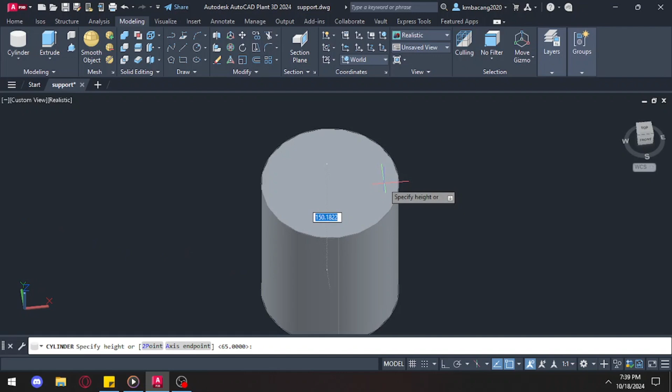First, let's make a cylinder that is 65 millimeters in radius and 20 millimeters high. With the same center, we'll make another cylinder that has a radius of 62 and is 65 high.

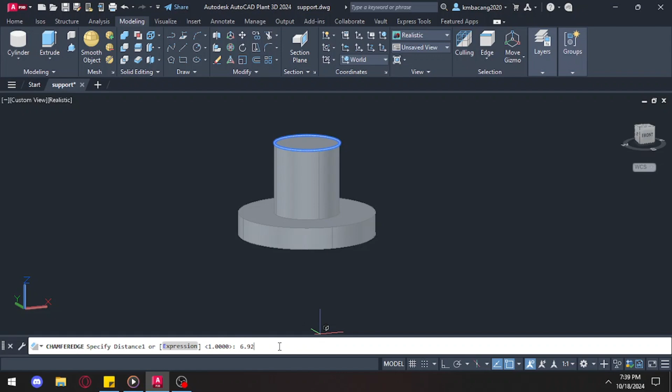And then we'll use the command chamfer edge to cut the edge of the top cylinder by 30 degrees. There's no option to put the chamfer at a certain angle, but through calculations we can know that one length of the thing is 12 and the other is 6.9.

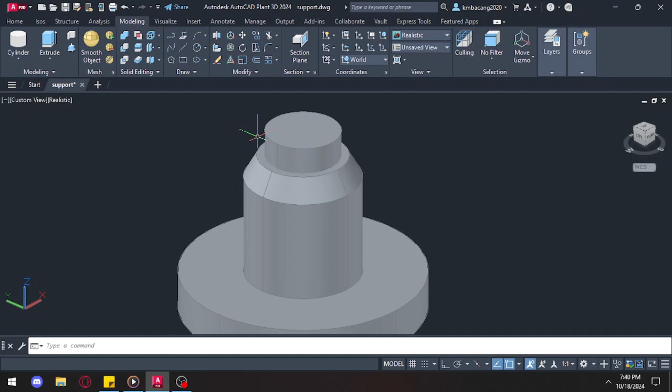And then we'll subtract a hole on top of the cylinder that is 40 radius and 26 high. We're done with the main component now. What's left is all the cuts that we'll make in the bigger cylinder from the beginning.

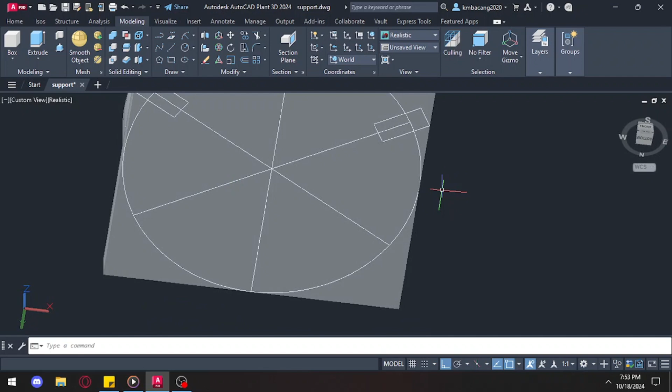Here I made the reference lines of the things we're about to cut from the cylinder with the right angles and measurements. Afterwards, we're gonna click those reference lines and make them into regions so I can turn them into surfaces.

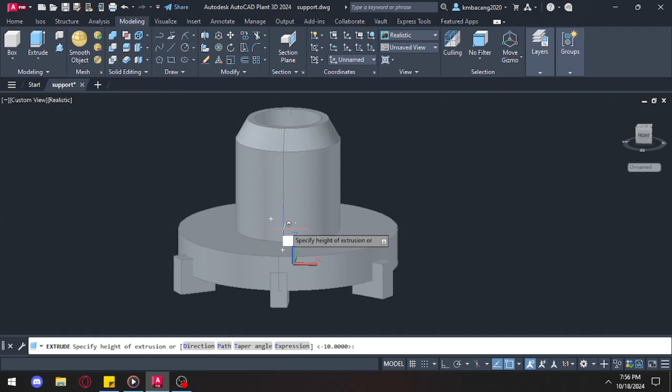And from surfaces, we can extrude them so we can extend all those shapes upwards in order to subtract them from the bigger cylinder, like this.

Now we're on to our last parts, which is putting the hole from the top, piercing through everything, and then another one on the x-axis.

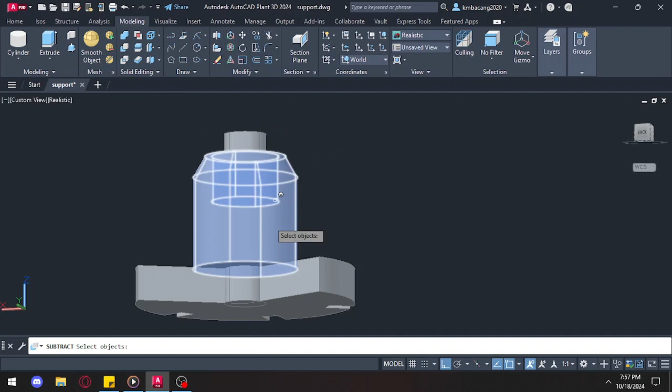And with that, we're done with our coupling part. Here is a full 3D view of it.